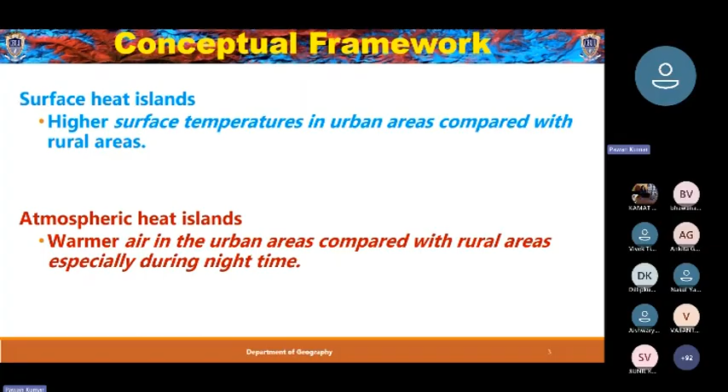Let's understand this with a simple schematic diagram. This is an area, this is a city center, and as we go outside the city center, the density of built-up areas decreases and characteristics of rural areas increase. This is the condition in daytime.

In daytime, the surface temperature is highly variable, largely depending on the characteristics of the objects. Where we have green objects, it's less. Where we have asphalt materials and more black-like roads, it is high.

If we talk about the air temperature, this dotted line shows the air temperature. Not largely any difference, but it's very interesting here - let's note this: this area has higher temperature compared to this. We will discuss it with the example of Delhi.

The second thing is, at night, there is less difference in the surface temperature of objects and the air temperature. Here we are observing a pattern - this is the rural area temperature at night, and this is the temperature of the city area. It is relatively higher compared to the rural areas.

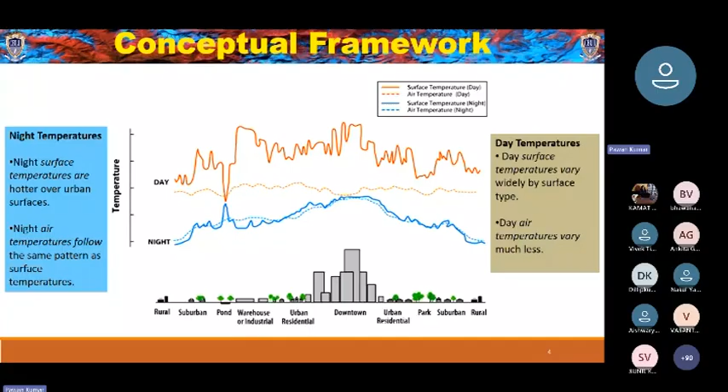This phenomenon forms an island, which you can clearly observe here - if you draw a straight line, it comes like this, and the temperature in the city region is higher compared to the rural area. This phenomenon, especially formed during the night, is known as urban heat island.

This is the formation of an inversion layer. We have the urban center here, and if we go into the suburb, the temperature forms a perfect island where we have higher temperature. The inversion rate also varies with locations. In the urban area, there's a slightly low level of temperature decrease as we go higher, and again there's an increase where we have this urban heat island formation. In rural areas, the temperature starts decreasing as we go higher. This is the schematic diagram to understand how these things work.

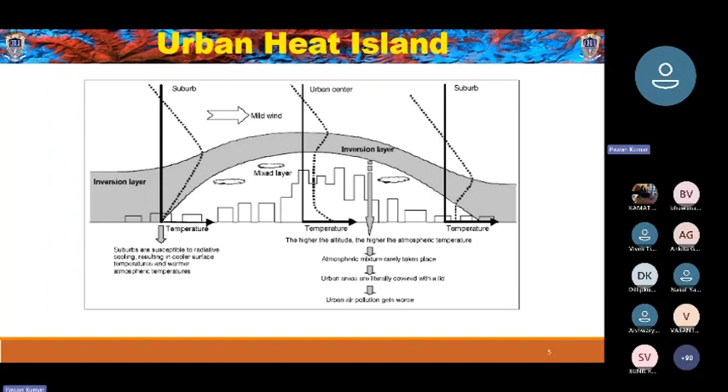There are various other factors leading to or associated with the urban heat island. As temperature increases, electricity consumption increases, and the comfort of the urban area, normally at night, is decreasing.

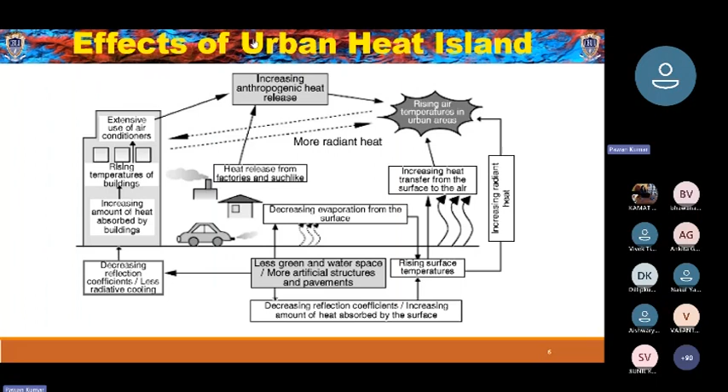What are the causes of urban heat island? Normally in urban areas we have large built-up areas because of space and population requirements, and there is continuous reduction in vegetation and green urban spaces. Along with this, water bodies are continuously reducing - you can see the example of Chennai, you can see the example of Delhi. There are lots of wetlands, and nowadays these wetlands are decreasing.

Lots of heat is generated by human activities, and in urban areas we have high-rise buildings, which reduce air circulation. As air circulation decreases, the mixing of air from rural to urban areas to normalize temperature variation also decreases, and this reduction of air circulation has a multiplier effect on the formation of urban heat island.

Then there's urban geometry, where we have high-rise buildings, especially in CBD regions, that have canyon effects. In urban areas, lots of people are living, density is so high, and energy consumption is so high, so waste energy from energy use also adds to this effect.

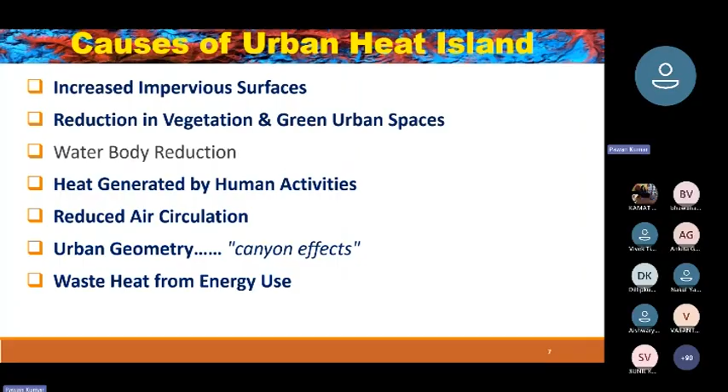Let's take an example of India's first planned city - Jaipur. This is a satellite image from 1977. This is Jaipur walled city.

Expansion surrounded the walled city, not very dense on this side. By 1989, the dense built-up area increased from this size, and this is the area where we have traces of urban development. By 2016, this complete area is very dense urban area, one of the fastest growing cities of India.

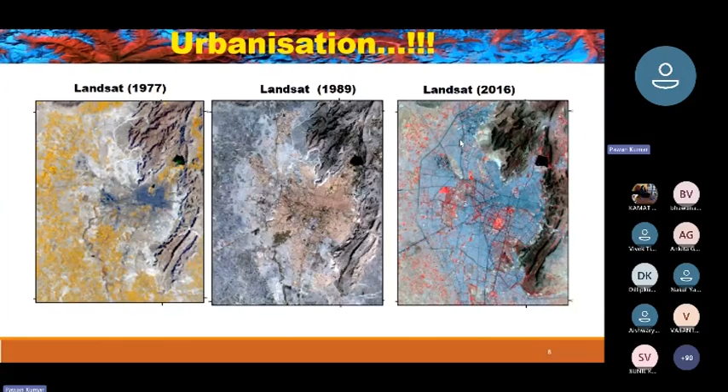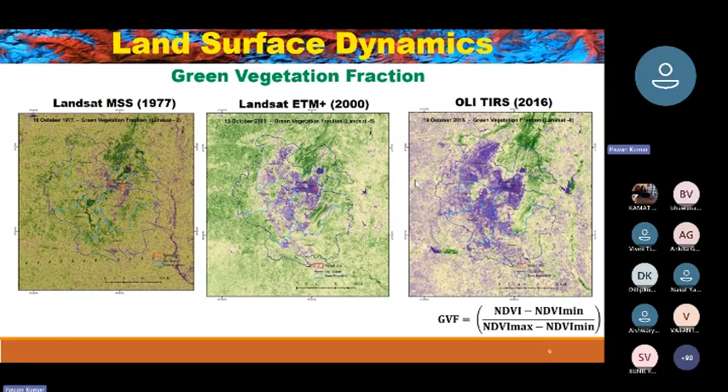What it adds to when we have a large built-up area is changing the land use land cover, and we have a significant decrease in the green vegetation fraction. This is the green vegetation fraction of Jaipur. You can see there's a significant decrease, and what it resulted into is this.

Urban heat island can be measured with various techniques. We can measure it with MODIS. MODIS is a satellite which has Terra and Aqua sensors, observing Earth surface temperature with a resolution of 1 kilometer, 4 times a day.

Various people use Landsat data to extract the temperature at a resolution of 30 meters. But the limitation with Landsat data is mostly this data is acquired in the early part of the day, from 10:30 to 12. This is not the time where we can observe the difference in temperature for this phenomenon, but there are other limitations we will discuss.

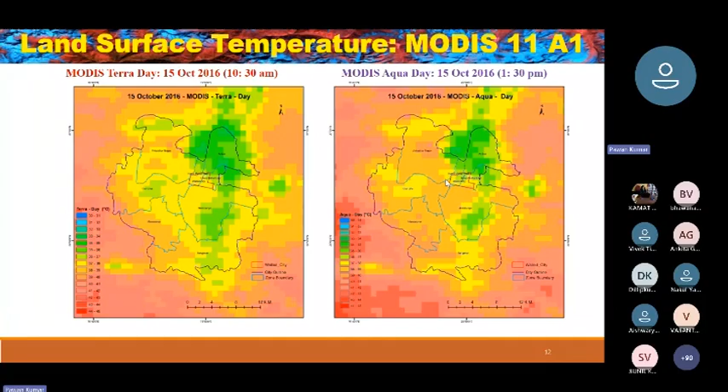During the night, we clearly observe that the intensity of urban heat island increased in comparison to June. This phenomenon is more prominent during certain periods, very less especially in the months of July and August when it's rainy season, monsoon is there, clouds are there, so they govern the climate.

As monsoon retreats, this phenomenon intensifies, especially in the months of October, November, December, January, and it's of different intensity in May and June, but the phenomenon persists. The only change is the degree of variation of temperature in the urban area compared to the rural area.

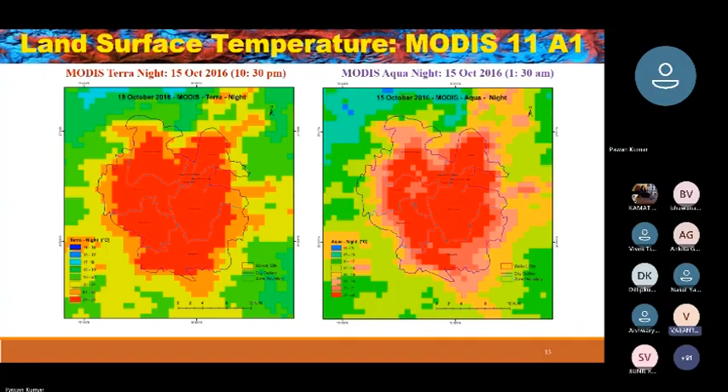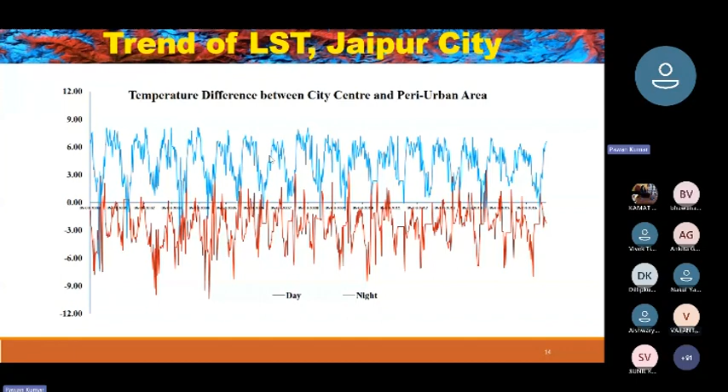So this is the temperature difference - normally this is the daytime temperature difference and this is nighttime temperature difference. During daytime we are forming a cool island, and at nighttime we are forming a heat island over the cities. This is how it goes with the season.

This is a study on Delhi. You see, in the daytime there's a formation of a cool island here, and again at nighttime there's a formation of urban heat island, and you can also observe the intensity. This phenomenon is very common to all major urban settlements where city size is significant.

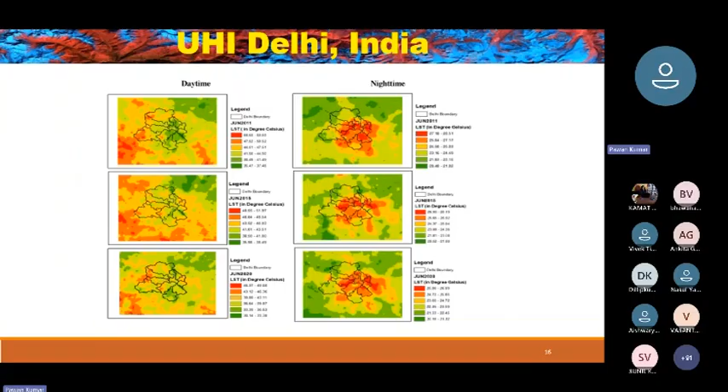There is a significant reduction in the green or vegetated area. So this is happening - what are the impacts of urban heat island?

It alters the microclimatic conditions in the urban area - there is a complete reversal or complete change in the urban microclimate, and this variation is sometimes 7 degrees, 8 degrees Celsius difference, or sometimes 10 degrees. Normally it's 4-5 degrees, but in some cases it's more than 10 degrees. So you can understand the difference.

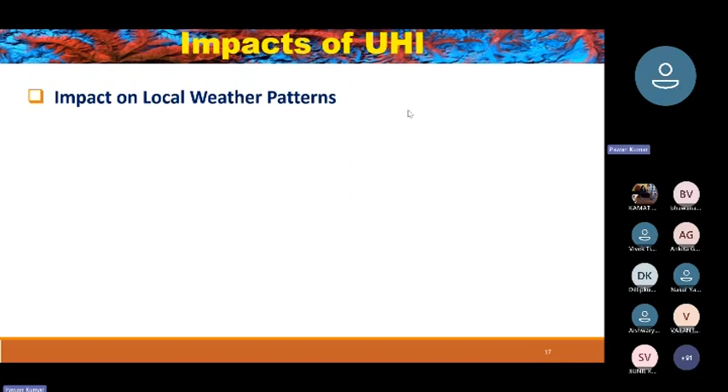What it leads to when there's a high temperature in the urban area - first step, it leads to an increase in energy consumption.

We have air conditioning, and if you see in cities like Delhi, till October and from March onward, people start using air conditioning. Earlier this was not the case. So in the months of May and June, there is a huge increase in demand.

This sometimes leads to failure of the supply line and grids. It also leads to public health risk. There are various ecological impacts, leading to distress in the ecology as well as human beings. There are economic impacts too, because when there is a difference of 5, 6, or 10 degrees of temperature compared to the rural area, it leads to more consumption of electricity and proportional economic impacts.

How can we mitigate the urban heat island? There are various methods to combat it, and there are efforts at local and global levels. We will discuss 7-8 applications, and some success stories or major movements from all over the globe.

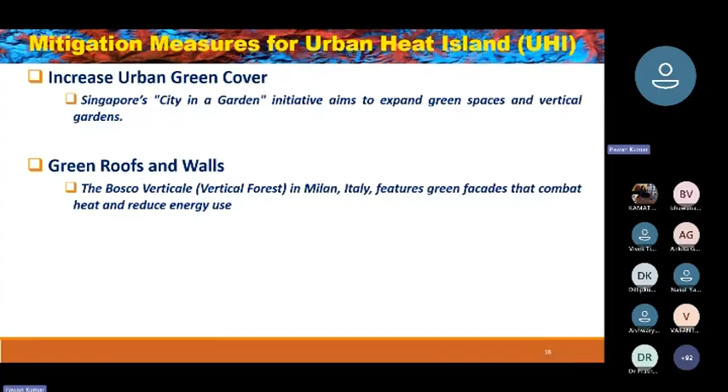Another strategy is green roofs and walls. This is Bosco Verticale, called the vertical forest, in the Milan city of Italy, where they try to combat heat by making green roofs and gardening their walls, putting green surfaces or vegetation on the walls.

So this was Bosco. Sir, I think your voice is not audible. Okay, let me check the mic. Now it is audible. Any improvement? Yes, yes, it is audible. Okay. We are hearing you.

This was another case study. The third combat strategy adopted over the globe is cool roofs and pavements. Largely this technique was implemented in Los Angeles city in the USA, where they tried to reduce surface temperature.

Sorry to disturb you sir, two times we lost your connection for a few minutes. Okay, so let me continue, you continue.

There are five impacts of UHI: it alters weather, increases energy consumption, enhances the risk of public health, disturbs comfort of ecology, and leads to economic impact.

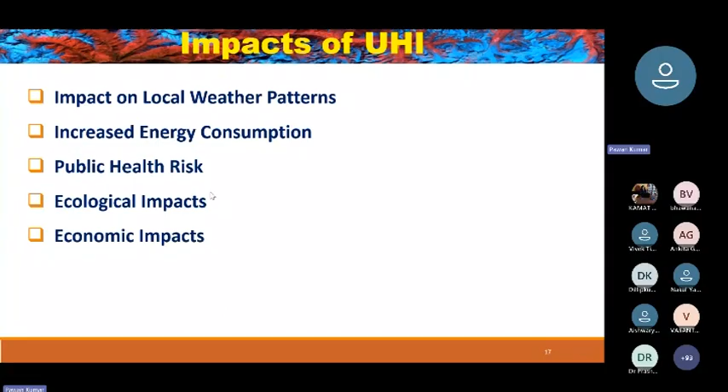There are three case studies. First is Singapore, where they have increased significant green spaces in the area, and the city is known as city in the garden with around 50% vegetation or green cover area. Another study is Bosco Verticale, mainly in Milan city of Italy, where they do vegetation on the walls and designed buildings so they can have more green spaces.

The third is cool roof pavement. It's mainly observed all over the globe, but the main movement was in Los Angeles, where they used cool pavement technologies to reduce surface temperature.

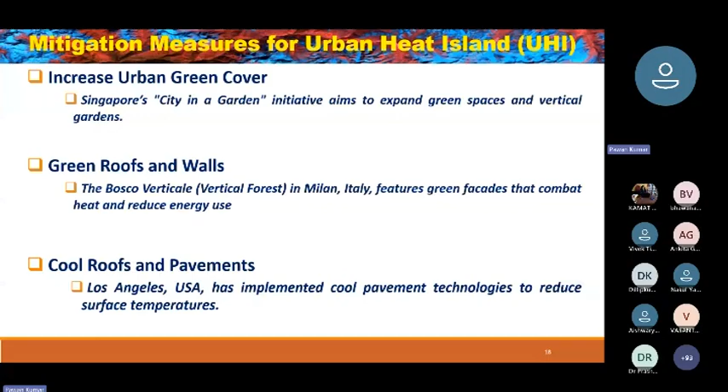These are some photographs of Singapore city. You can observe the green vegetation fractions and high-rise buildings, and simultaneously over the urban landscape you can observe green vegetation and water bodies.

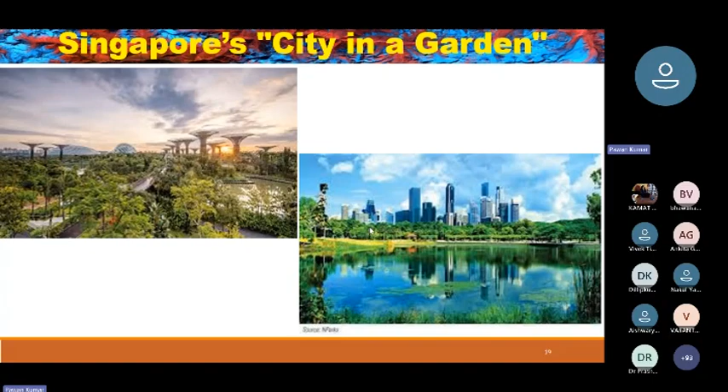This is Bosco Verticale. Buildings are designed so they can have more vegetation, more green cover area on them. Vegetation is the best solution because it absorbs heat and completely changes the micro interaction with incoming solar radiation, in terms of albedo. There are various effects of vegetation.

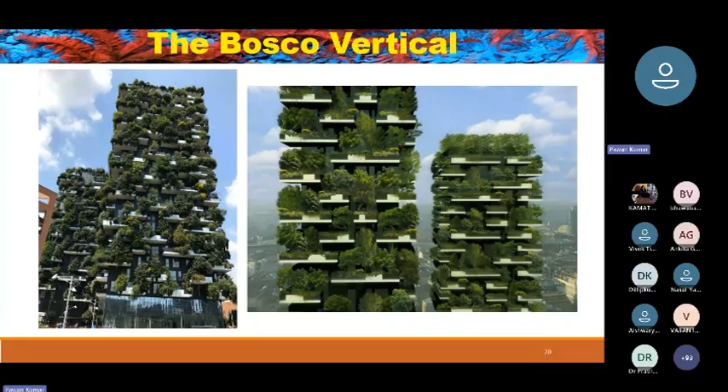Another is cool pavement. You can see the color of the pavement is designed so that it absorbs less heat. When it is light colored and absorbs less heat, there is less temperature in the daytime as well as in the night time.

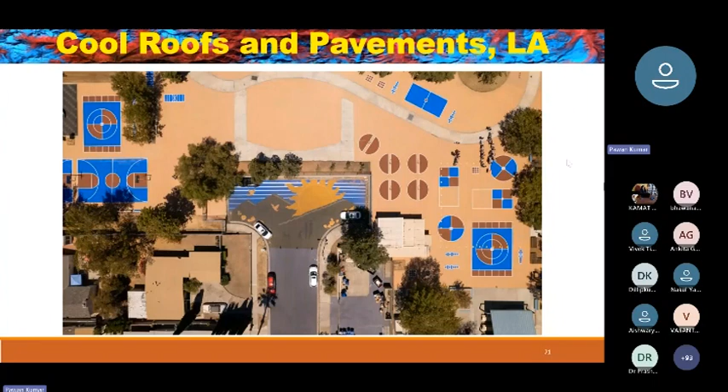There are other measures too. In Tokyo, they tried some experiments with urban design, planning so that urban areas can have proper circulation of air. They designed ventilation corridors to mitigate heat, because when there is air circulation, there is mixing of air from urban area to rural area and rural to urban, and this is how heat gets transferred.

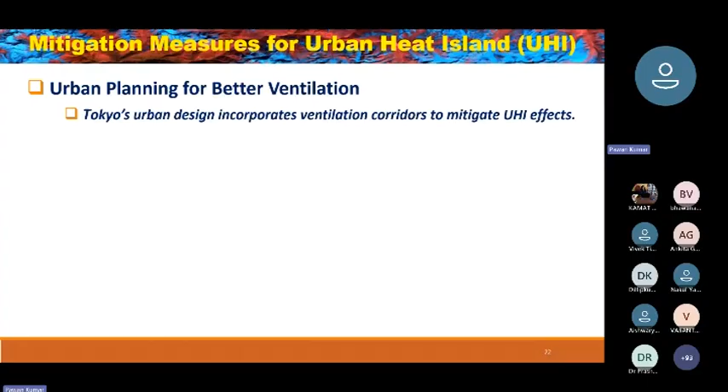There is another popular project in Seoul, South Korea, where they replaced a complete bridge and restored the stream. The restoration of the stream reduced the temperature in the surrounding areas. Another mitigation strategy is in Chicago, where they launched a public campaign called the Green Alley program, replacing traditional alleys with permeable material to mitigate urban heat island effects and capture more water.

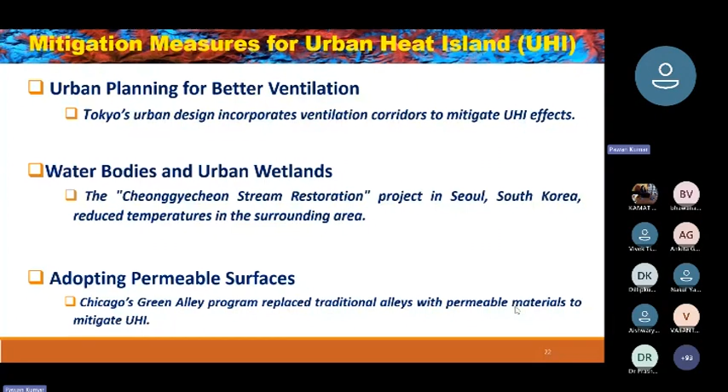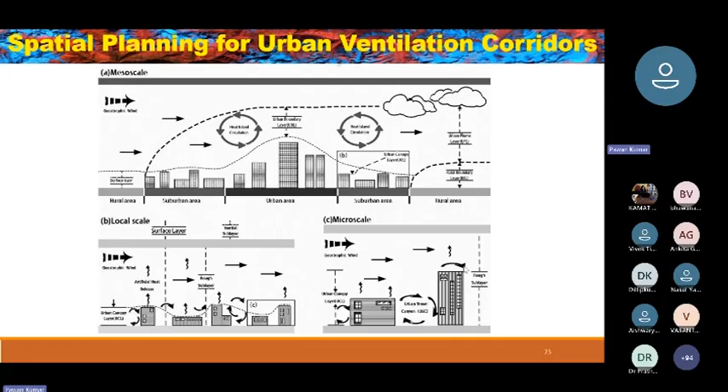So this is how normal circulation and urban canopy work. This is at meso scale, this at local scale, and this at micro scale, showing how heat is interacted and exchanged, and what circulation operates in urban areas.

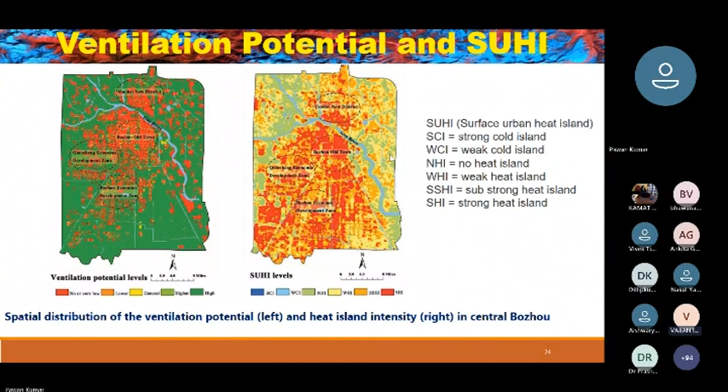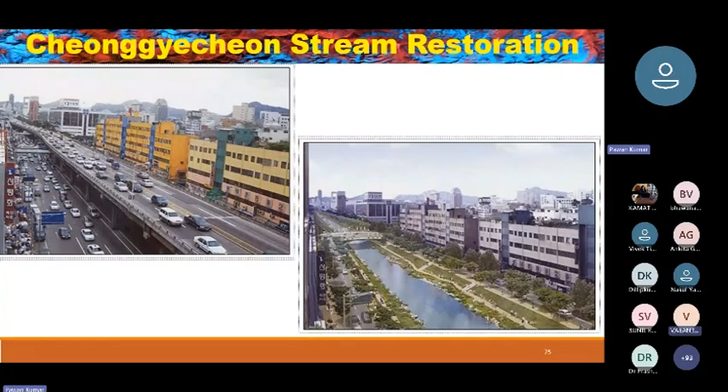There's another example in Mexico, where they promote vertical urban gardening - the Via Verde project - located along highway overpasses and underpasses.

In Havana, Cuba, they promote urban agriculture. With this, they not only try to mitigate the urban heat island, but also promote more sustainability, reduce hunger, and increase agricultural production, especially in urban areas. So it helps the ecosystem, economy, and environment.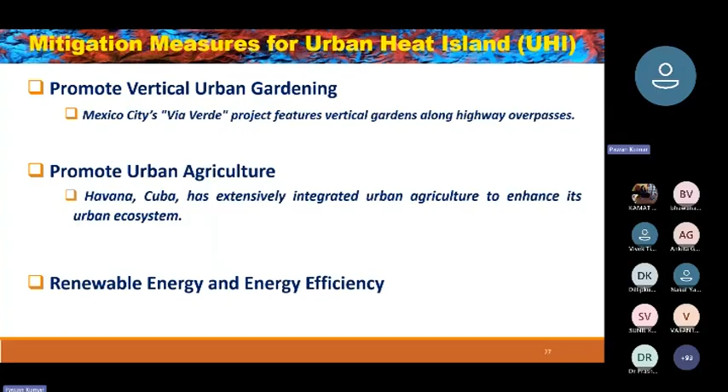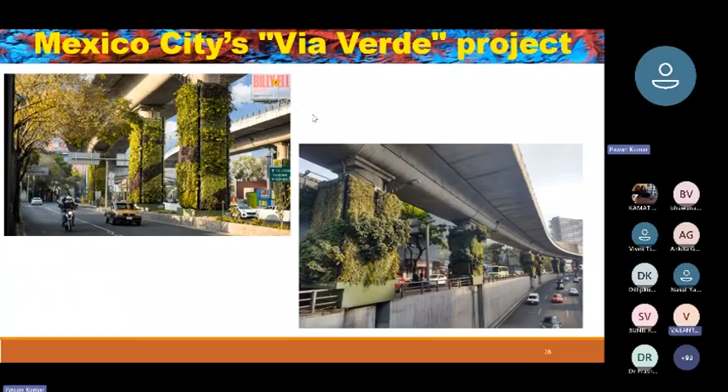This is the Mexico Via Verde project, where they try to create more green, vegetated areas under flyovers or wherever space is found in urban areas.

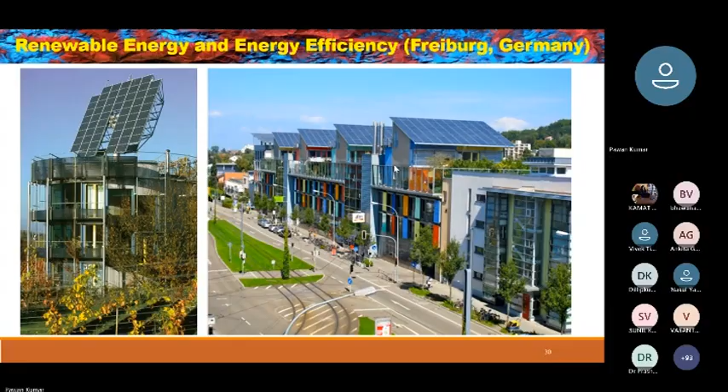This is the renewable energy and energy efficiency model of Freiburg, Germany, where they installed energy-efficient solar power panels to generate their own urban energy requirements and reduce the UHI effect. This is the complete model of this green city, where they try to get energy from all renewable sources like wind and solar panels. Wherever they found space - on walls, roofs, or public transport - they covered it with solar panels to generate energy and mitigate the UHI.

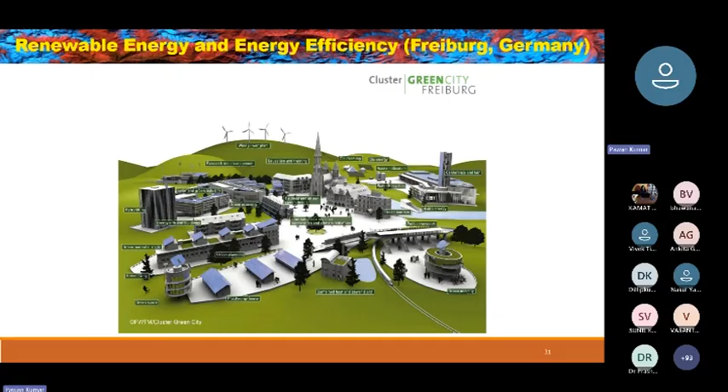There are lots of public campaigns, such as in New York City, the Cool Neighborhoods NYC program - a public engagement initiative where trees were planted in neighborhoods, on roads, in backyards, or wherever space was found. This was the Cool Neighborhoods program of New York City.

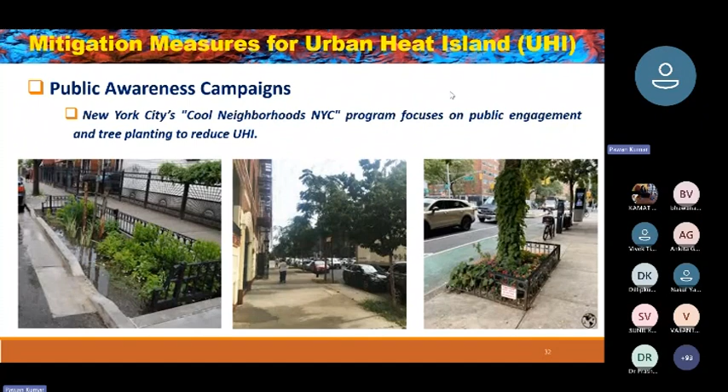So these are various mitigation measures of UHI. There are many - I've tried to list a few of them. What are the major mitigation measures?

This comes from Japanese government planning. They try to mitigate the urban heat island not with one major change like a ventilation program, but through public policy at various levels - from individual to household to community to planning and policy level - using various methods.

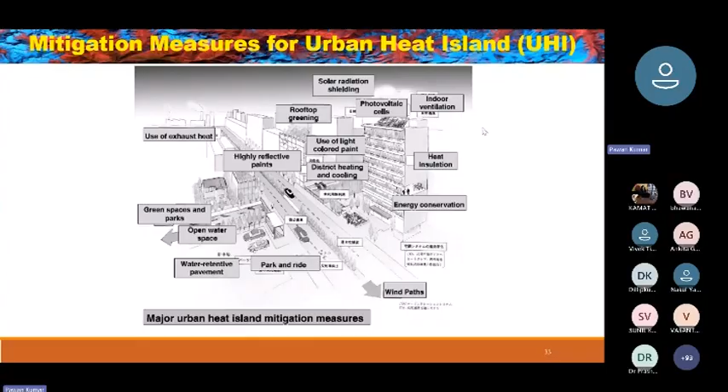In Japan, they have implemented this. Researchers suggest that rivers, wetlands, and reduced dependency on conventional sources of energy are important. If we depend more on renewable sources of energy and increase green spaces, we can overcome the effects of urban heat island.

And what are the challenges? It's not very simple when it comes to planning for billions and billions of people.

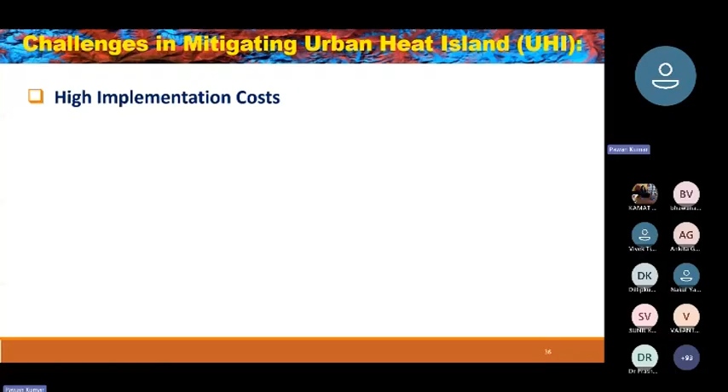First of all, all these techniques are very costly. They have high implementation cost, and normally these are policies of government that have to be implemented on private individual space. So implementation cost leads to ineffective implementations, and governments are also refraining from designing such policies because it will have high implementation cost on the individuals. So this is a major hurdle.

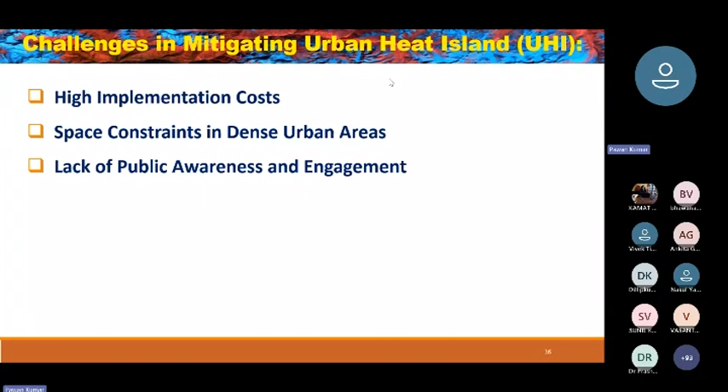In urban areas, it's very dense, so we have lots of space constraint because of the density and unplanned, haphazard urbanization. There is no significant awareness in the community about the alteration in the climate and how it impacts human beings, and there is a lack of engagement of the people at the policy and implementation level. We have gaps in policy, planning, and governance.

And all these measures not only cost high in implementation, but they also cost high in maintenance, and their maintenance is a challenge.

Another issue is we have very limited data and very limited research on urban areas, and there could be various ways to mitigate it. But we need a proper database, proper 3D mapping, proper modeling of air circulation, and understanding of local air circulation and distribution of heat. For urban areas, there is a requirement to generate micro-level data of urban heat islands and understand the characteristics happening at the near surface.

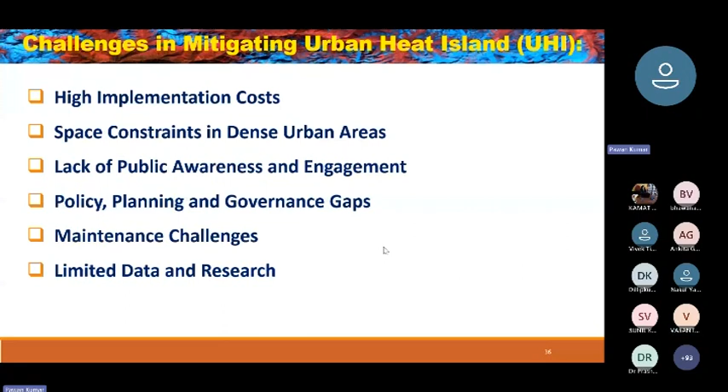That has to be measured, and on the vertical scale, there has to be mapping of the temperature in the city at various levels in the air. Lots of research needs to be done, lots of data needs to be generated for efficient planning.

What needs to be done? We have to do extensive research and technological innovations. Nature-based solutions should be adopted in the urban space. We have to promote public awareness and more engagement. We have to rely on data-driven urban planning instead of traditional planning methods to design smart and sustainable cities.

Policy initiatives are required at the local level to global level, and global initiatives need to be taken in this regard. This planning should be equitable and inclusive, and we have to integrate more renewable energy systems. This is how we can make these improvements cost effective in the long run for the household, and public awareness needs to be promoted.

Okay, that's all from my side.